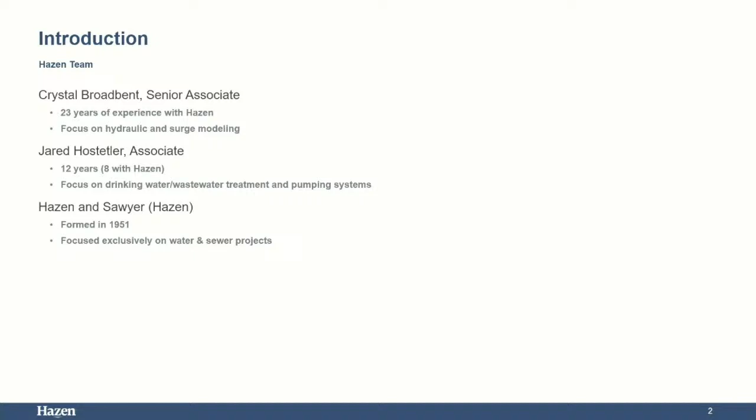Hazen and Sawyer, which we affectionately call Hazen, is a company formed in 1951. We're headquartered in New York City. We have about half a dozen offices in the Carolinas, and again, we're both in Raleigh.

So the meeting agenda today — some things we want to cover are what is a master plan, what are our goals and drivers in these efforts. We want to talk about system demands and all the growth that I'm sure you're all well aware of. I'll talk about the water treatment facility, and Crystal will cover the water distribution system.

This is the first water treatment facility master plan, but it's an update to the distribution system master plan that Crystal developed in 2017, 2018. So we're looking at every component in the system, and our goals are to plan for growth, look at redundancy and resiliency, manage and mitigate risk where we can, improve system capacity, optimize operations, and address ISO ratings that Crystal can speak to. We want to provide preliminary engineering for developing projects, and ultimately identify major capital improvements that we can roll into the city's budget.

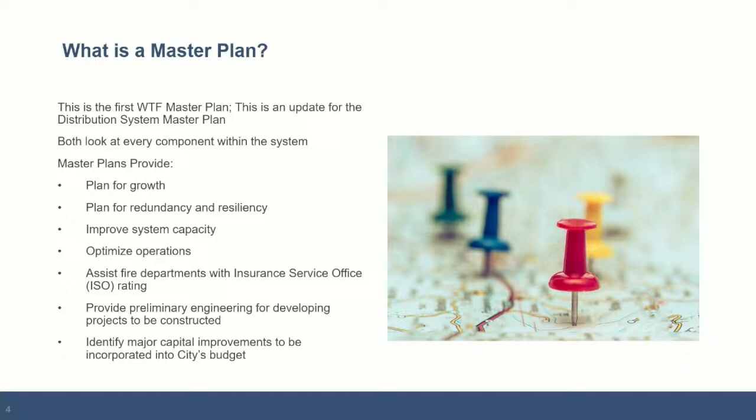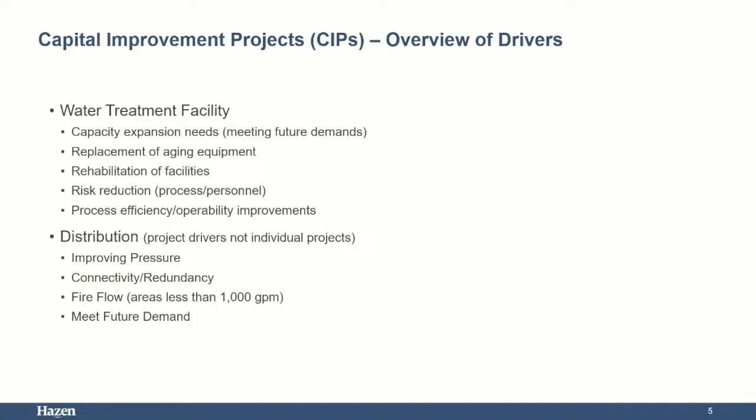The drivers for the water treatment facility capital improvement projects, or CIPs, include capacity expansion needs and the ability to meet future demands. We'll talk about replacing aging equipment, rehabbing facilities like structures in need of it, reducing risk for process and personnel where we can, and improving operations and efficiency. On the distribution side, it's about improving pressures in the system, providing connectivity with additional pipelines where needed so we don't have branches that aren't looped, improving fire flows, and meeting future demands. And with that, I'll turn it to Crystal.

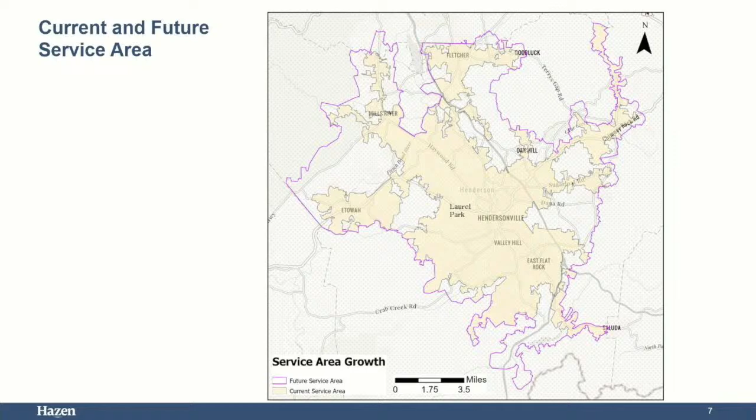Talking about future demands — to figure this out, we first look at your current service area on the water system. It's pretty extensive, shown here as the yellow shaded area. We met several times with both the city and the county to determine where the future service area boundary should be, depicted here as the pink boundary line. We use traffic analysis zones to identify where population growth as well as employment growth will occur.

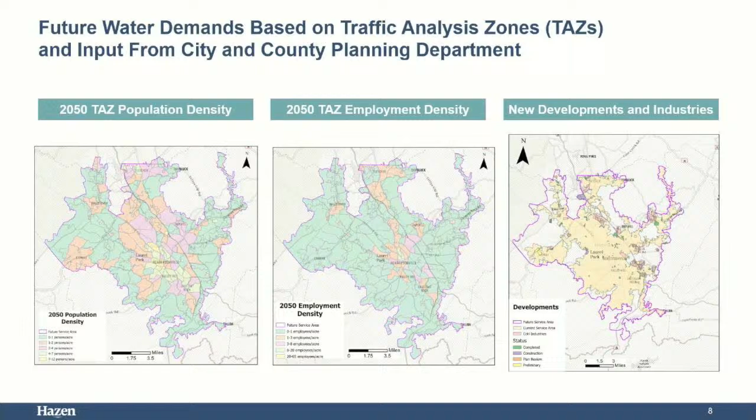And on top of that, the city knows where they have already approved development plans. So we incorporated those developments that are already approved and going to be in construction in the next 3 or 4 years, as well as areas that could be ideal for industrial demand. Those three things together give us our overall future demand projections.

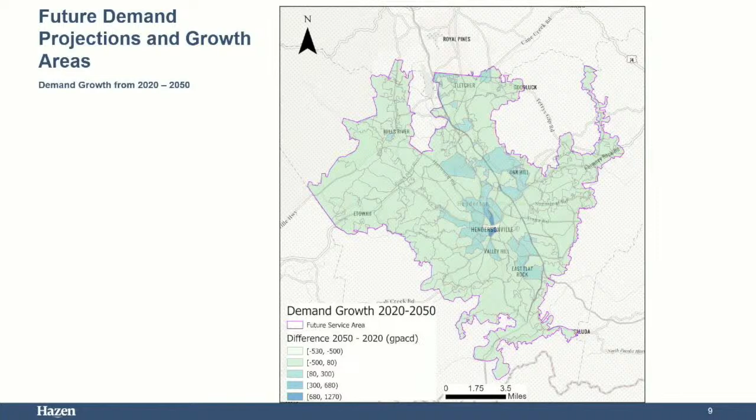This is showing you growth from 2020 out to 2050. The lighter the color, the less growth, and the darker the blue, the more growth we're expected to see in your area. You guys probably live here, so you can vouch for where you're seeing this growth.

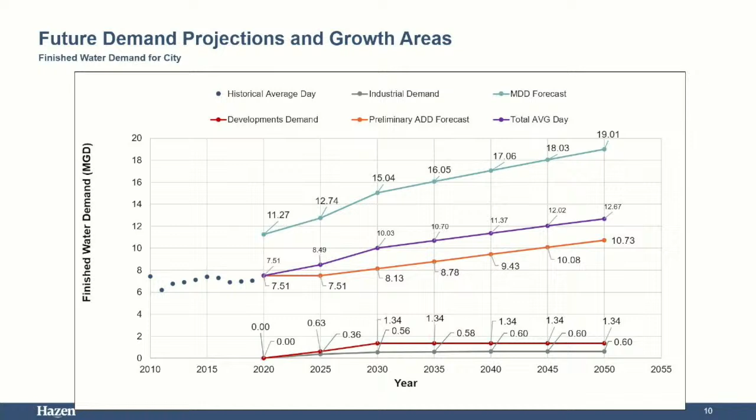That average day demand considers what the TAZ said, which is the orange line, the development demands, which is the red, and the industrial demand, which is the gray. Then we look at the historical peaking factor the plant has experienced and apply that to the average day to make sure we can handle peak demand out in the system, and that's about 19 MGD by 2050.

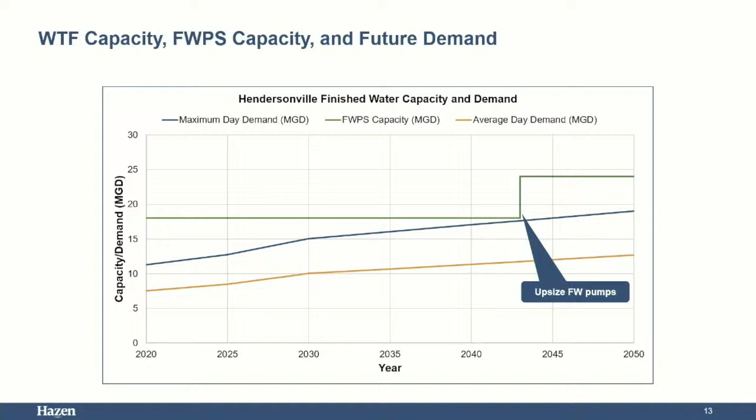So just looking at how it grows, if we flip through the slides, this is the projected average. Using a peaking factor of 1.5, we get to the max day. Looking at the finished water pump station's capacity, we do know we need to do some upgrading because they have to stay above that blue line.

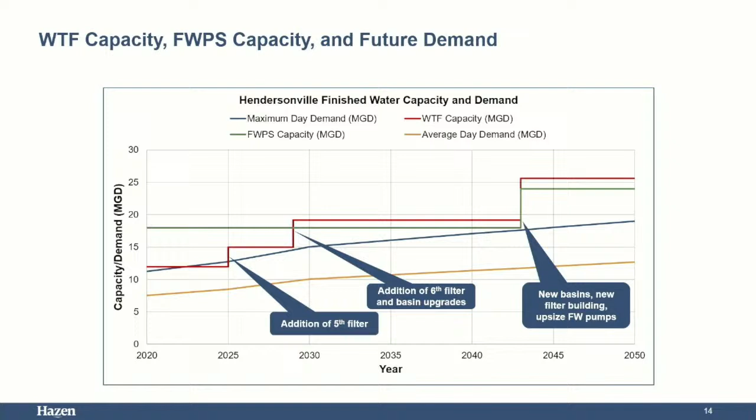On the water treatment facility side, we're adding an additional 5th filter, and right before 2030 a 6th filter needs to be added. And before 2045, some new basins, filter buildings, and upsizing the finished water pumps. Jared's going to dive into the water treatment facility.

As many of you know, the water treatment facility is located on Haywood Road, I'm sure you've driven by it numerous times. Originally constructed in the mid-1960s with a number of subsequent major improvements. It's currently permitted to treat 12 million gallons per day. In 2023, the average daily flow, as Crystal indicated, was about 7.3, and the maximum daily flow was 9.4.

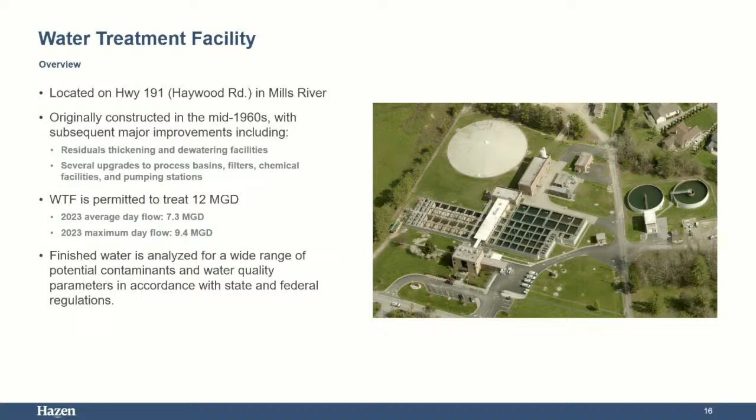And of course, the finished water is analyzed for a wide range of potential contaminants. Monitoring and reporting are conducted in accordance with state and federal guidelines. So we're going to step through from source to tap and work our way through this process of review. The first thing is our raw water screening and pumping facilities.

The facility is equipped with 4 raw water sources. The French Broad Intake and Pump Station is currently under construction and will be online later this year. The Mills River Intake and Pump Station is located essentially right at the intersection of 191 and 280 and is permitted for 12 MGD. The North Fork and Bradley Creek reservoirs are located in the Pisgah National Forest, with a combined permitted withdrawal capacity of about 4.5 MGD, flowing by gravity down to the water plant. So the total permitted raw water capacity, big takeaway here, is north of 30 MGD.

Some improvements we're recommending are that the air burst equipment be replaced at the Mills River Intake and Pump Station, which keeps the screens clean that sit in the river. Obviously nothing at the French Broad because it's still under construction. From the North Fork and Bradley Creek reservoirs, we're recommending that those aging transmission mains, as Adam indicated, some in excess of 100 years old, be inspected and assessed to confirm their remaining service life.

Moving on to the splitter box and rapid mix.

Back up, sure. I go over the Bradley Creek. What is it there, really intake lines, or is that all? It's the lines from those reservoirs down into town. Down in the town? That's right. Okay, I think about 16, 17 total miles of line. Again, that's aging cast iron, in some instances about 100 years old. Is it 2 lines that come together to make one, or do they separate? They converge in Mills River. Can I back up for a second? So one of the things about cast iron that old is it's usually unlined, which means it's tuberculating and the actual space inside gets smaller and smaller over time.

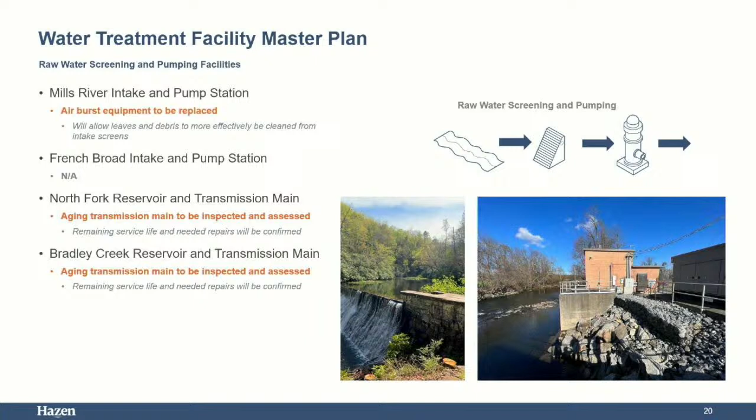So moving inside the fence, as we like to say at the water treatment facility, the splitter box and rapid mix basins. The splitter box receives all the flow from various raw water sources, along with raw water treatment chemicals, including the coagulant, polyaluminum chloride, which is added there. The flow is then split to the east and west process basins, which have rapid mix basins equipped with vertical mixers.

Interestingly, the plant staff realized that they don't need that mixing energy. They're getting the coagulation they need without those mixers, so those mixers have been turned off in the interest of energy efficiency.

Some recommendations here: we're recommending some interconnections of that raw water piping as it comes into the splitter box to provide some operational flexibility, and some minor structural repairs. You'll see a little bit of concrete wear on the outside of the structure.

And then increasing or extending piping on the west train during a future expansion phase. Essentially all the growth for future filters and basins will be on the western side of the water treatment facility due to space constraints, so we'll need to extend piping that way.

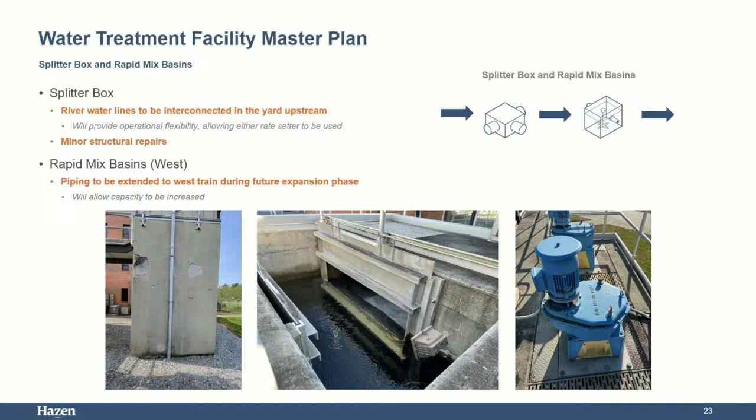Moving on to the floc, or flocculation, basins. This is a mixing process, and the goal here is to provide a certain amount of mixing time and mixing energy to agglomerate the raw water chemicals we're adding with the particles in the water, creating a larger particle that can then be settled out in the sedimentation basins downstream.

The kicker here is that we need a certain amount of mixing time, and on the eastern side of the facility, we're not getting that. So we're recommending some retrofits to those eastern basins during a future expansion phase to provide that additional hydraulic retention time and address some minor structural issues as well. And then, as I've indicated, new basins on the west to increase capacity there.

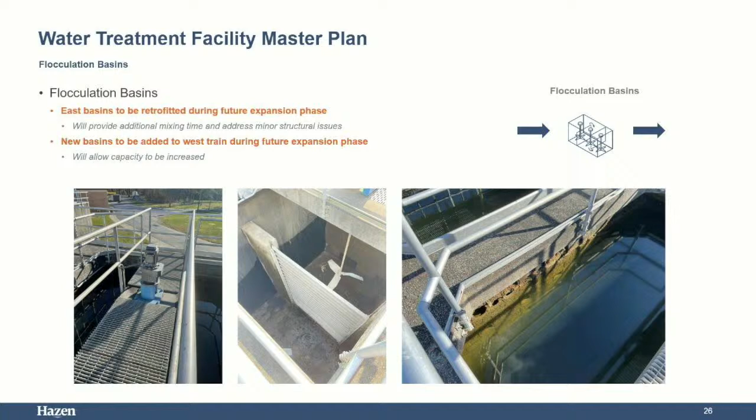Sedimentation basins, I like to call these giant swimming pools, no moving parts here. The goal is to provide quiescent conditions for those flocs to settle out, forming a sludge layer that's then removed periodically. The treatment capacity is determined by the basin geometry, so obviously you can only put so much flow through a certain size concrete box.

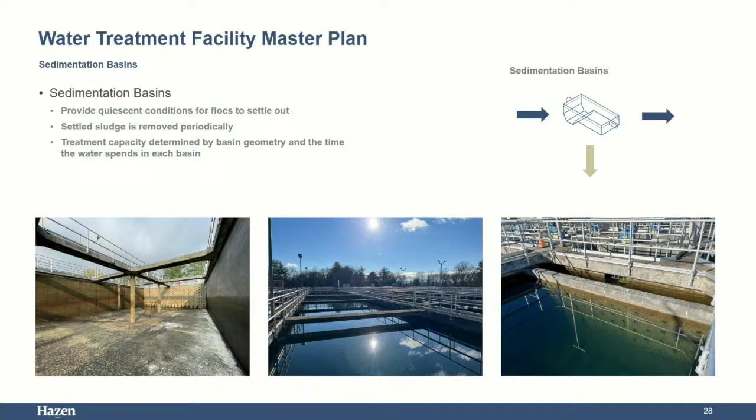The caveat to that is that we can add various technologies. This is a tube settler technology shown here on the left that essentially increases that effective settling area and allows us to push a bit more flow through that same geometry, increasing the capacity of the basins without needing to add more.

So we're recommending that in one of the more near-term phases of expansion, and then new basins will need to be added well into the future on the west side of the facility.

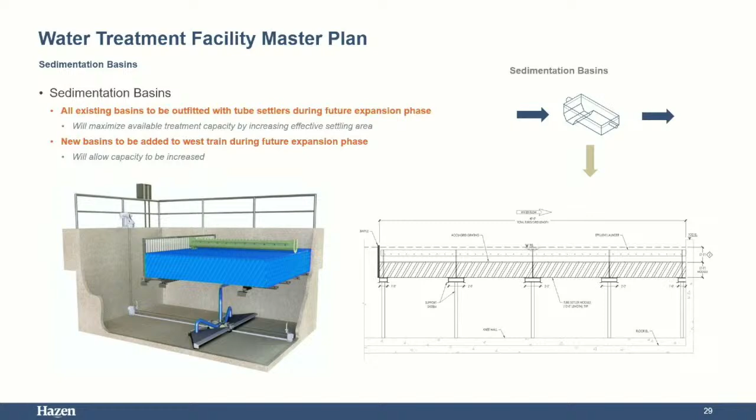Some other minor structural issues that we noted, including some cracks and some mortar repair that needs to be conducted, and then some minor process efficiency improvements, including valve replacement and adding some portable cranes to raise and lower equipment into and out of the basins for maintenance and things like that.

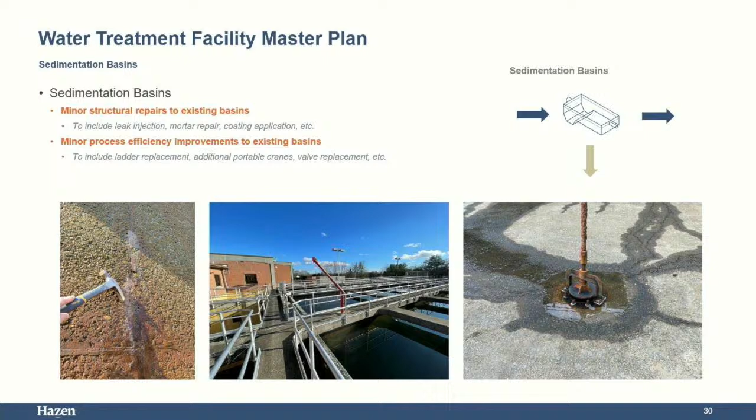Moving on to the filters. I think we all know how a filter works, but we're removing particles here that have been carried over from the sedimentation basins. The media bed consists of layers of anthracite coal and sand. Chlorine is added here; this is the primary location where chlorine is added for disinfection of the water. These filters are backwashed about a couple times a week on average.

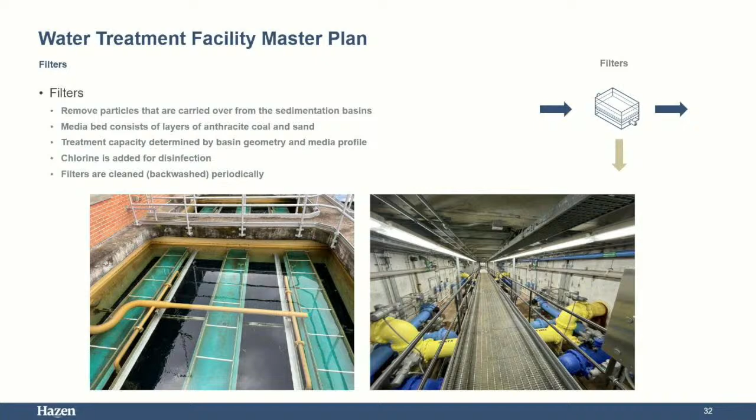So there's a project underway currently to add a fifth filter that'll be placed into service in 2025, increasing the rated filtration capacity to about 15 MGD. We're recommending a sixth filter be placed into service in about the next 5 years to take us to 19 MGD of filtration capacity, and then well into the future, 7th and 8th filters will be required.

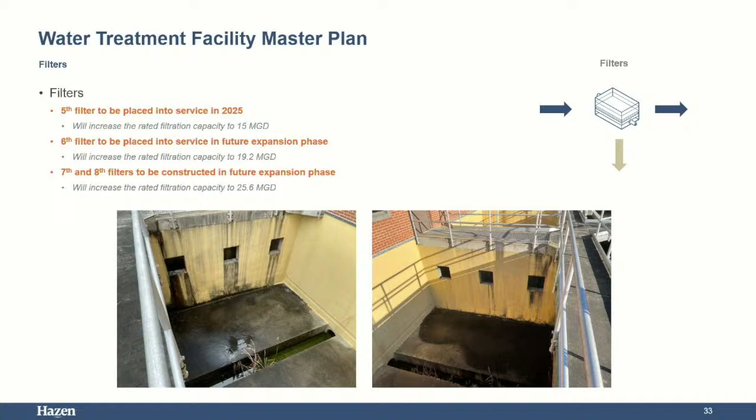Some other filter-related items: we're recommending that an additional backwash pump be furnished in the near term, providing redundancy for this critical process to keep that filter media clean. This is kind of a recurring theme you'll see today, maybe we've got a single point of failure, a single pump, a single tank, something like that. Let's provide redundancy and resiliency by adding a standby.

Additionally, in the future, as we add those new basins on the west side of the facility, we'll need to make room for a future filter building, so we'll need to relocate the backwash air scour blowers that are also used to keep that media bed clean, and at that time we would recommend that they be replaced.

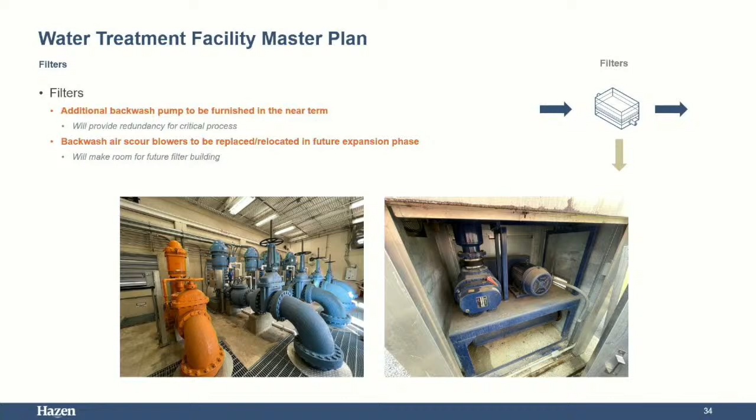So finished water storage - this tank is called Clearwell. It's 2 million gallons. It provides contact time for chlorine and the other finished water chemicals that are added. It also provides reserve storage volume, so it's essentially a large bucket we can pull from to fill the distribution system. It's located just upstream of the finished water pump station.

We're recommending that an additional 2 million gallon clearwell be constructed, again for redundancy. That'll allow the existing clearwell to periodically be brought down for maintenance. When that new clearwell is constructed, we recommend bringing the existing clearwell down for maintenance, and at that time installing baffle curtains, which will provide additional chemical mixing and contact time within the clearwell by providing a maze type of path that the water has to follow.

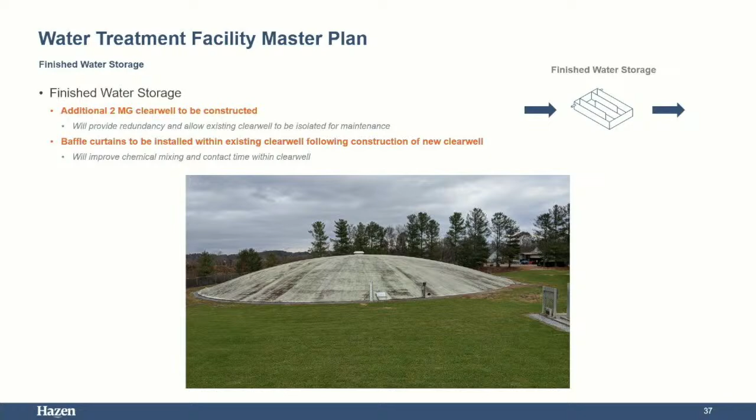So the finished water pump station was recently upgraded here in the past 5 years. Obviously, this is what's pumping finished water into the distribution system, ultimately to customers. It's equipped with 4 finished water pumps and has a firm capacity of 18 MGD, which just means that with the largest pump out of service, we can get 18 MGD out the door. It's got an ultimate firm capacity of 24 MGD when we upsize those pumps. This pump station houses the backwash pump as well.

So as we've discussed, we're recommending upsizing finished water pumps number 1 and number 2 in the future to provide 24 MGD of firm pumping capacity. There are some ancillary improvements here as well - some plumbing improvements, some minor structural improvements to be able to more easily facilitate the removal of equipment and get equipment in and out.

And then a redundant finished water line that we're recommending - this would be routed from the finished water pump station through the yard to the transmission main on Hwy 191. This just provides a couple different ways of getting water out the door. In the event we have a catastrophic failure of one of those lines, we still have a way of getting water to customers.

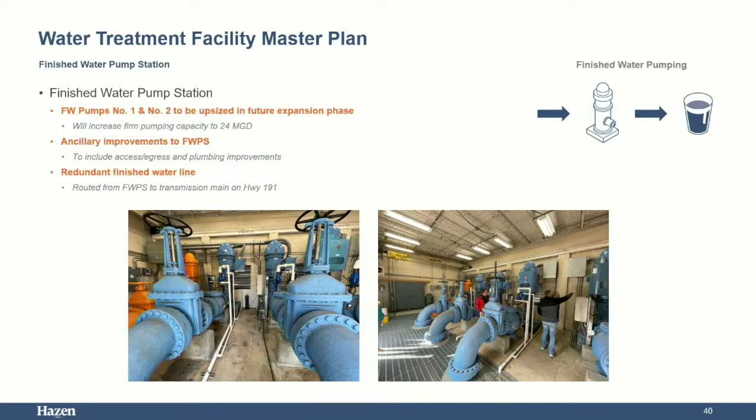We looked long and hard at ways to improve energy efficiency at the water treatment facility, and the short story is that there's really no low-hanging fruit there. The plant's being operated really efficiently. We had a couple minor recommendations in terms of operating the finished water pumps in the most efficient way with pump combinations and speeds to minimize energy per unit volume that we're pumping out the door. But really, not a lot that needs to be done or can be done to improve energy efficiency at the plant.

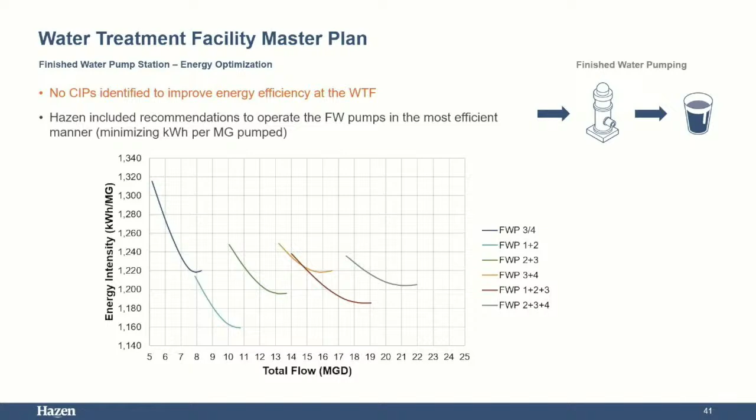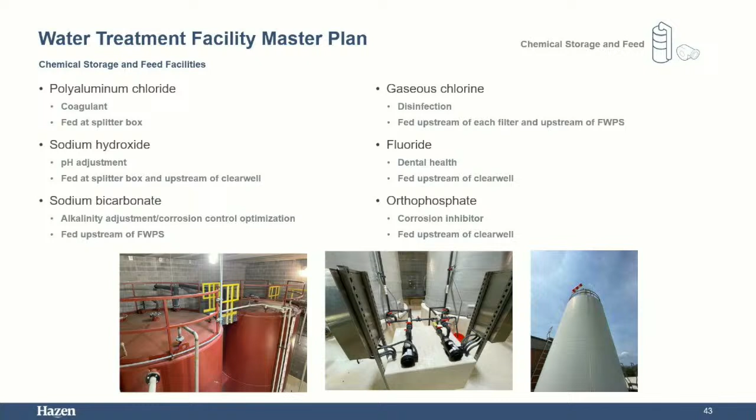So chemical storage and feed - there are 6 primary chemicals that are added to the treatment process. Polyaluminum chloride is added at the splitter box; this is the coagulant to form the flocks that we're then settling out. Sodium hydroxide is used for pH adjustment. Sodium bicarbonate is a major one used for alkalinity adjustment and corrosion control optimization, in conjunction with orthophosphate, which is a corrosion inhibitor. We also have chlorine gas for disinfection, and then fluoride, which is added for dental health.

With respect to the sodium bicarbonate, we're recommending that an additional silo be constructed, again for redundancy. This is a single point of failure. It's a critical process for the corrosion control optimization process. The existing feed equipment and the existing silo is at the end of its useful life and needs to be replaced. But before that, we would recommend that the additional silo be constructed, so we've got duty and standby mechanisms.

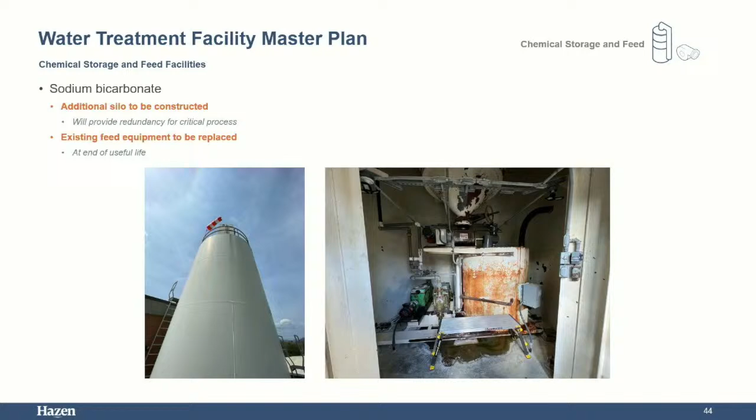Chlorine gas is used for disinfection, and unit prices nationwide have increased substantially in recent years. There's also been a number of potential supply chain interruptions that have been noted. So what we're recommending here is that a new chemical building be constructed in the future to house temporary sodium hypochlorite storage and feed facilities - bleach that could be used as an alternative disinfectant to the chlorine gas. This new facility could also house future tanks for something like orthophosphate.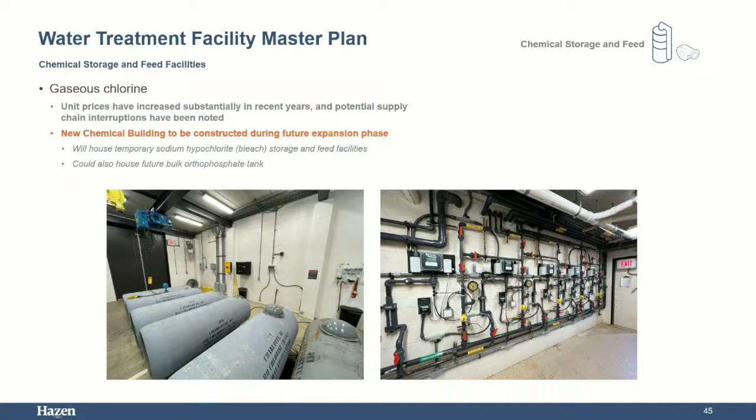Some miscellaneous chemical improvements - spare metering pumps, some chemical transfer pumps to move chemical from a bulk tank to a day tank, and some minor structural improvements as well.

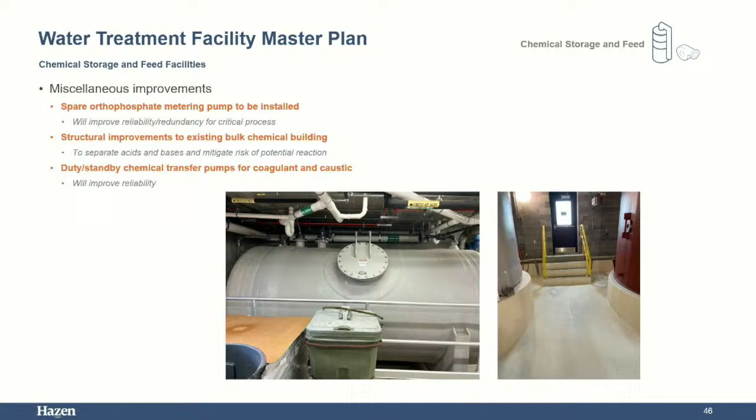And then finally, the treatment residuals. The waste streams from the sedimentation basins and the filters flow by gravity to this sludge transfer pump station. The blended residuals are pumped from here to thickening and dewatering processes for ultimate disposal. This station is equipped with a single pump that's approaching the end of its useful life. So in the interest of resiliency and redundancy, we're recommending that existing pump be replaced and a second pump be installed to provide redundancy for this critical process.

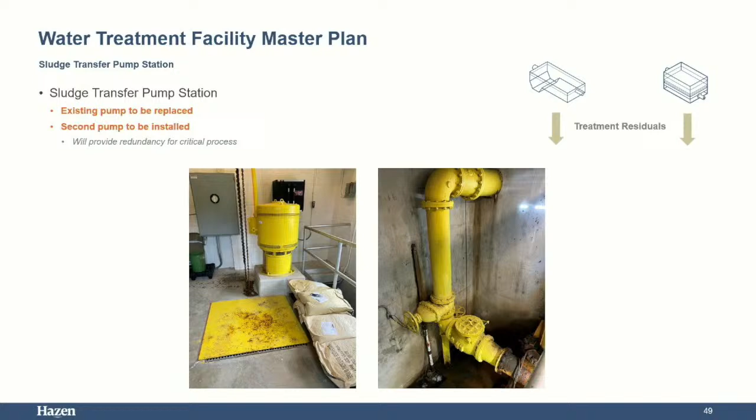And then some miscellaneous concrete and structural repairs that we've noted. We're recommending a new maintenance facility. I don't know how well you can see that center photo, but the plant staff have a very small area to store spare parts and to maintain equipment, so we're recommending a maintenance facility. And then some miscellaneous control system improvements to adjust some set points and provide some additional functionality.

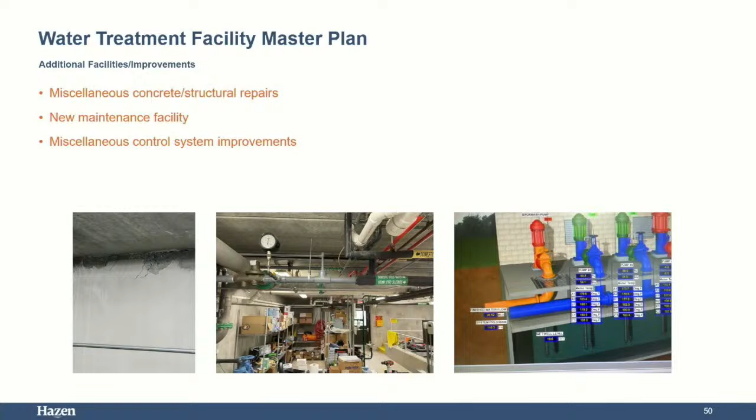Looking at capacities, on the raw water side of things, we've got north of 30 MGD of ultimate capacity. As we go through the treatment process, 25 to 26 MGD of treatment capacity through those process basins and filters. And then when we get to the finished water pump station, that's where we're essentially limited to 24 MGD by the nature of the firm pumping capacity of that station. So we're saying build out capacity of the water treatment facility is 24 MGD, and our maximum daily demand out to 2050, the end of the planning horizon, is about 19.

Do the chemicals, are they priced at a certain price, or are there discounts for buying larger amounts of chemicals in bulk? And if that's the case, does it make sense to have larger storage space for purchasing chemicals in bulk?

It's a good question. I'm not familiar with exactly how often Hendersonville negotiates those rates, but they're often negotiated, frequently every couple years. Some of those chemicals will degrade over time — specifically sodium hypochlorite. If your storage tanks are too big, over time you're losing the activity of that chemical. So it's kind of a fine balance there.

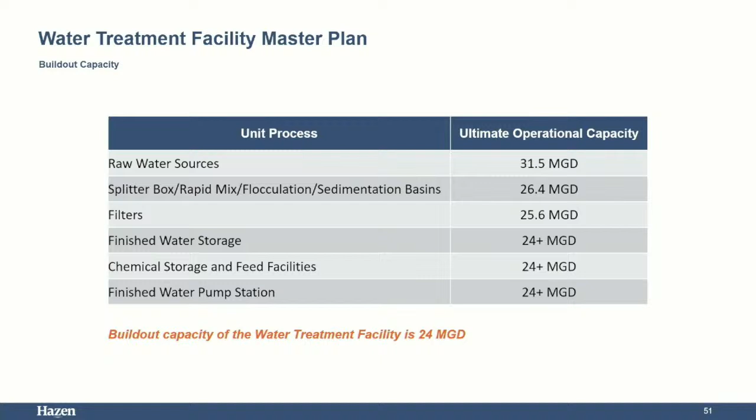So we've tabulated here all these different capital improvement projects that we've noted, and I've got some cost estimates shown in 2023 dollars. The big ticket items in this first phase, the 2020 to 2025 window, is the addition of that fifth filter, which is currently underway, and then the addition of a standby backwash pump.

In the 2025 to 2030 window, it's about 29.3 million total, but the big ticket items again are the inspection of those aging transmission mains from the mountain reservoirs, basin retrofits, the addition of a sixth filter, second clear well, and then the maintenance facility and the chemical building. So yeah, about 29.3 million there.

When you're talking about replacing those lines, will they have to be completely replaced or can they be lined? I should specify, this is inspection and assessment — we looked at a variety of different technologies. That's a fairly conservative number for the inspection of those lines, but it is 16 or 17 miles of line. So our recommendation would be to inspect the whole thing.

There are technologies that can be inserted and travel through the line. There are other ways, using ultrasonic technologies, from point A to point B. However the city ultimately ends up tackling it, we'd recommend inspecting the full extent of those lines and then determining whether there are areas that need to be replaced, or whether we're still good for another 20 to 50 years. Do we own the equipment that actually inspects the line, or do we rent or lease it? It would be a third party that would come in to assist with that.

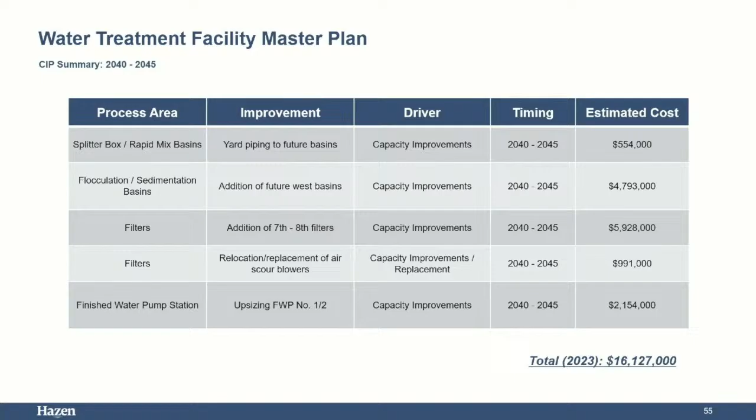I guess I would be remiss if I didn't say, I'm from Hendersonville originally. My parents still live here and drink the water. So it's been an honor and a privilege to work on this project. And as you well know, fantastic water, great water quality.

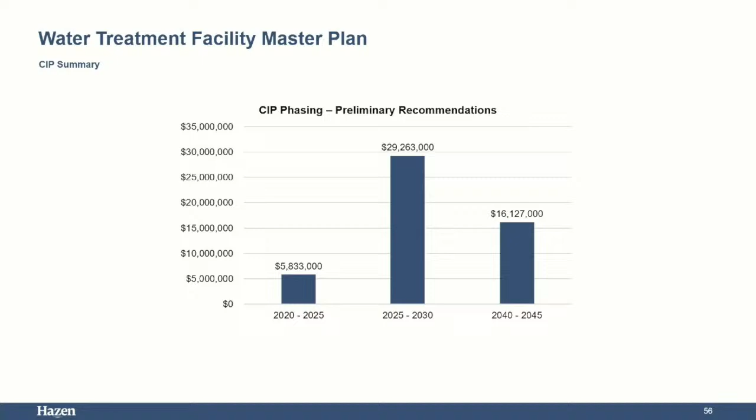All right, here we go. So this is your hydraulic model.

We first built this model in 2015 with the support of the fire departments. One of the things we mentioned we can utilize the model for is to assist the fire departments with their insurance ratings, and that requires a highly calibrated model. We update calibration every couple of years to ensure we're giving them the answers they need for their insurance. The model is built from the GIS, and the city provides us updated GIS.

From that, we get the diameters of the pipe, the age of the pipe, the material of the pipe, and we bring that in, which helps us determine what we call the roughness, or the coefficient, that determines how much loss is occurring in the pipe. So the downtown areas that have a lot of cast iron, it basically takes an 8-inch pipe and makes it act more like a 4-inch. Areas that have a lot of PVC stay the same size.

We use the billing data to make sure we're allocating the demand out to where the demand is actually occurring, so the water actually flows through the pipes as it really does. We add elevations to make sure we're getting the pressures correct. And then the model does the calculations for us, telling us where the flow is going, what the pressures are, how the pumps are performing, and what the tanks are doing.

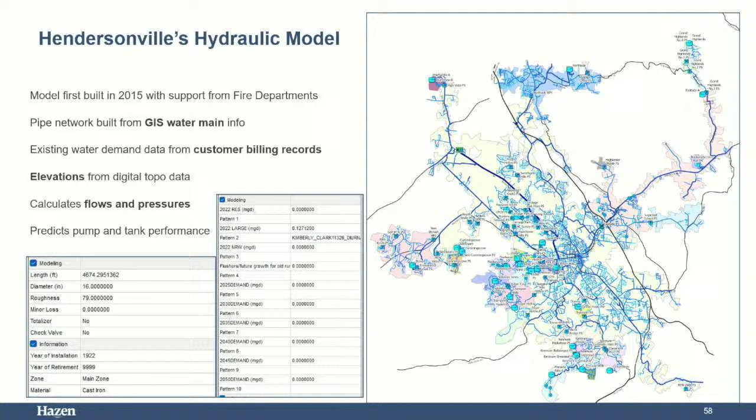One of the things we do is calibrate the model. What we mean by that is we actually go to the field. This is just the 11 sites for this go around - we've done about 11 sites every couple years. And we do fire flow tests.

We open hydrants and watch to see what the static and residual pressures were. We mimic that in the model and calibrate it, meaning we make changes, whether it's closing a valve we think might be closed - and the city goes out to investigate if the valve was closed - or if we need to change C factors, or correct some connection we don't have right in the model. As you can see, we calibrate within 5 PSI, and we're pretty much spot on with this model.

The next thing we do is make sure the controls are working correctly in the model. So we take the SCADA data we receive - here is an example. The dots are the SCADA showing how the tanks are behaving, and the solid line is how the model's predicting that same behavior. We do that for each pressure zone, making sure the model represents what's actually happening in the system, which builds confidence in the decisions we make from the model.

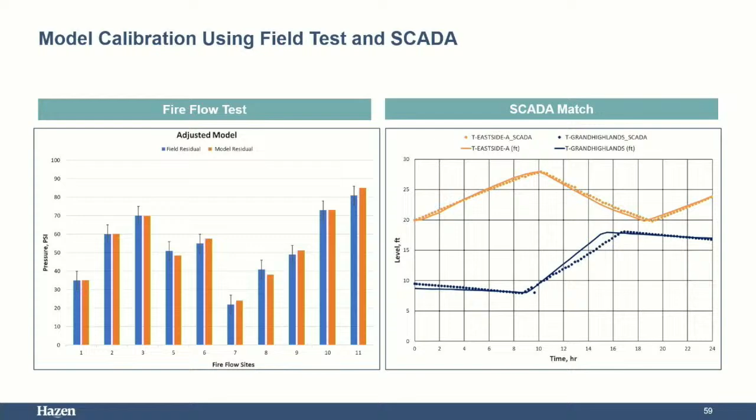In 2016, when we were doing this master plan last time, we identified areas with low pressures, and the city has since done projects to resolve these low pressures. On the north side, they put in a booster pump station and a new elevated tank, which brought the pressures up from close to 30 all the way up to the 60s. Etowah was another area that struggled with some pressure issues.

Since then, the Etowah pump station has come online, as well as the new elevated tank. Hebron was another expansion to resolve some of the low pressures near the Ewart tanks. And Sugar Hollow was another expansion that resolved issues. You will still see some areas of low pressure in the south.

In the prior master plan, we made some recommendations that we are also continuing to keep in this master plan, and we'll be showing that pressure zone change in a couple slides.

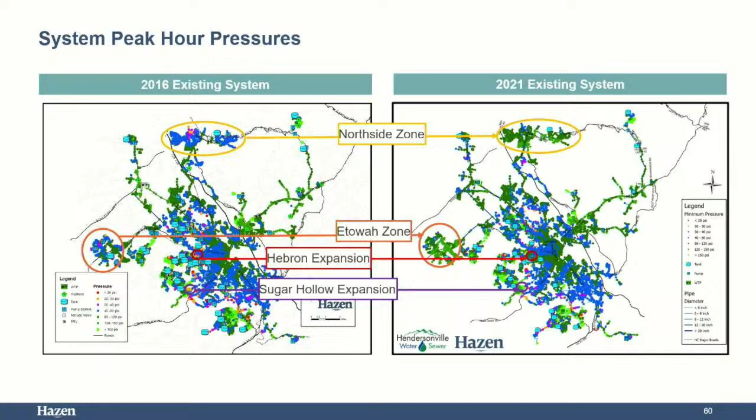The same areas we identified as low pressure also had low fire flow availability. These colors are based on what's available at 20 PSI, so anything red tells us you can't even get 500 gallons per minute at this hydrant. A couple reasons for this in your city are low pressures due to elevations or just small diameters. We can't really resolve the elevation issues unless we create new pressure zone boundaries.

So on the north side, we had low fire flow ability in 2016, but now because of the new pressure zone, we've resolved a lot of those fire flow issues by creating a new pressure zone boundary. Same thing with Etowah.

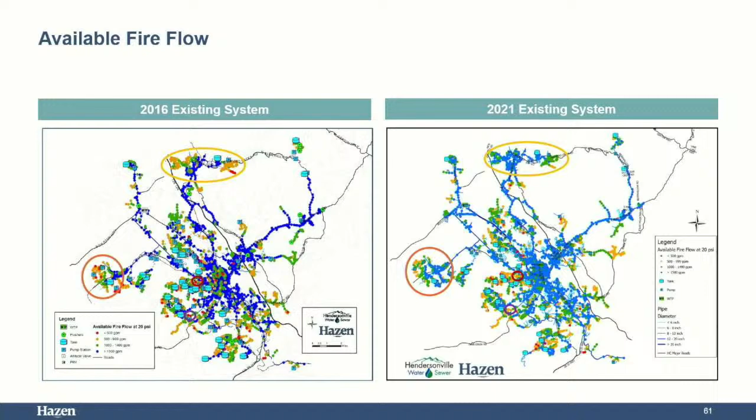The other thing the model can tell us is the age of the water. As the model predicts the water moving through the system, and because of the demand being pulled out, it can tell you what the age is. So everything identified here in red and circled in a box tells us that the age in these pipes is pretty old. That doesn't necessarily mean it's bad water - it just means the water's been sitting there in the pipe.

What we can utilize the hydraulic model for is coming up with a flushing program. It's a very specific flushing program called unidirectional flushing - very precise in how you open certain hydrants and close off systems. So you're flushing out the pipe at high velocity, cleaning out any debris or other issues. They have a plan to do that in each of these areas that report really high water age.

I have a question. Yep. How do you determine if it's a boil water advisory? I mean, how is that determined?

Usually that's when pressures go below 20 PSI. Is that what you guys do here? So it has to be below 20 PSI before they call a boil water alert. And usually your system will never see that.

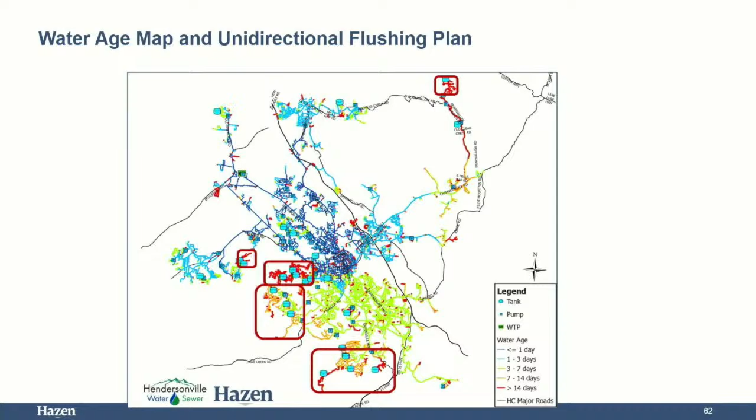So when we get into the master planning and project out to 2050, one of the things we did in the master plan is looked at every single booster pump station in the system and compared it to the max day demand. The pumps have to be able to pump out what the maximum day demand is - you can't meet that just with your storage tanks.

So this is just an example. In 2050, the east side, which is the yellow area - the blue area is where your water treatment plant feeds into what we call the main zone - the 2050 demand on the east side is about 2.84 million gallons per day. The firm capacity of the east side pump is only 2, so we need additional pumping capacity. There is space at east side to add an additional pump.

However, we feel like it would be better to have a redundant pump station, not just rely on one, because that's the sole source for this entire community, and there's a lot of growth potential out there. So we're recommending a Clear Creek pump station, also sized for 2 MGD, and a new transmission main to get the water over into the east side zone.

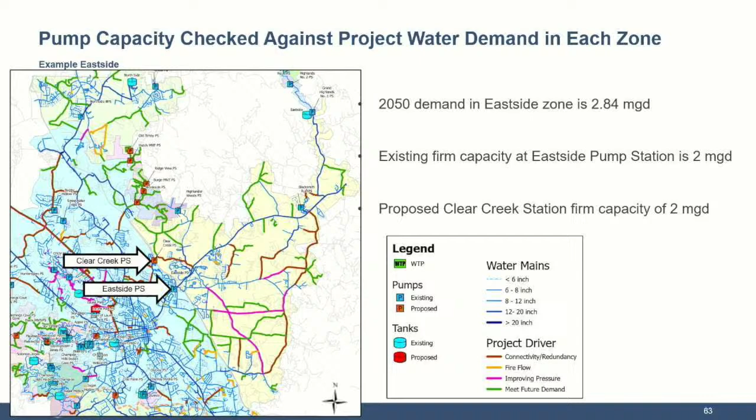So just real quick, also on this map, when you guys get back to look at it, we color coded by the pipe by the drivers. So the brownish colors are connectivity and redundancy, yellow was to improve fire flow, pink is to improve pressures, and green will be mostly just met by the developers when the demand calls for it.

So on the north side, there's some major projects we're recommending. One is we have to be able to get the flow out of the treatment plant into the system. Right now it's a 24-inch down Hayward, so we're recommending a 36-inch, and then transferring after Rugby to a 30-inch all the way down to Ewart Hill tanks. A lot of that's going to be in conjunction with the DOT, so some of that cost will just be upsizing the cost from the 24 to the 36 or the 24 to the 30, depending on how it works within the DOT right-of-way.

Again, you can see the Clear Creek pump station. We'll talk about Long John Mountain in the next slide. The 16-inch line to feed the Clear Creek pump station is currently an asbestos pipe.

It's pretty old, so we recommend replacing it and upsizing it from, I think it's a 12 right now, to a 16, and improving that pipe material as well.

You can also see here, highlighted in the orange circle, the whole reason for those water lines is to improve pressures in that area. Right now there's a little booster pump station that feeds some of this area. That will be removed by installing these water lines, also improving pressures down into an area that a lot of industry is coming into.

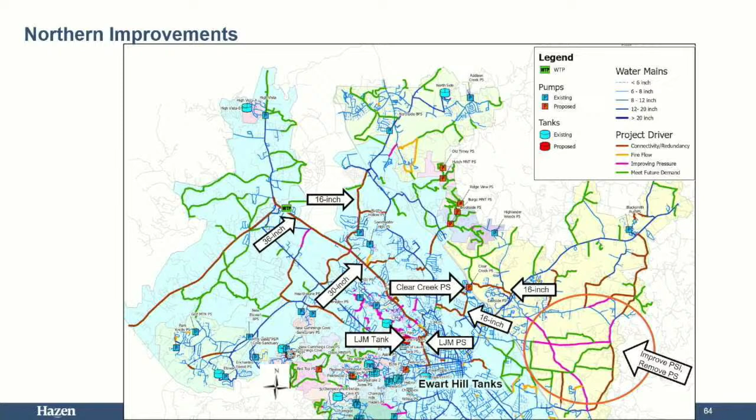So when pressures do drop within this new pressure zone, water can come in for a fire. This is a great improvement. It will save a lot on maintenance and energy over time, because you're only dealing with one pump station and one tank instead of a series of them.

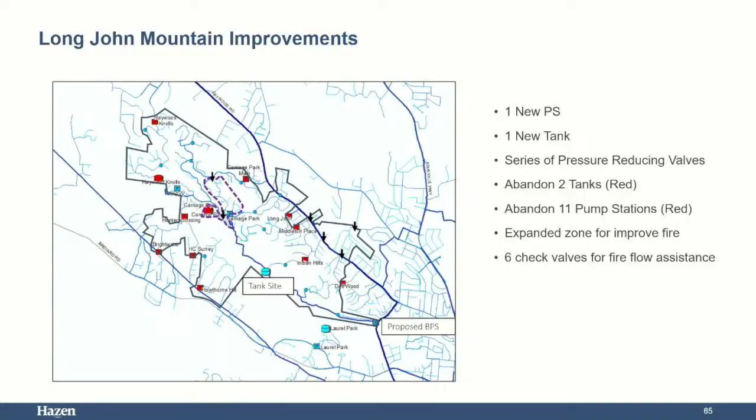So the southern improvements—I mentioned previously there were low pressure issues still in the south. This is where the new pressure zone comes in. I'm not sure what they're going to call it, just the south pressure zone, but I call the pump station the Crail Farm because it's on Crail Farm.

And then a new elevated tank, which would be the Glassy Mountain Tank location. This new pressure zone, outlined in the dashed orange line, will improve pressures everywhere. The city will have to confirm that the existing tanks and pump stations that come off this pressure zone will now have a new suction pressure.

So there might be some changes needed at some of the other pump stations, for example Kenmure, Greenmore, or Claremont. This greatly improves pressures as well as suction pressures at those pump stations, because they're pretty low right now.

The other circle up there points to another improved pressure area. One of them is very similar to a project they've already done—it's just adding a new line to the pump station, then back feeding over to an area that has really low pressures.

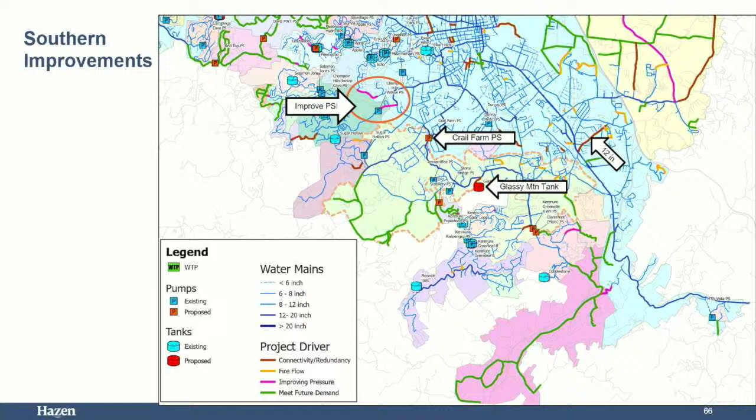Now that the Town of Laurel Park is part of your system, we can use that elevation to actually remove a pump station that was going to be needed to meet some of those pressure demands, just by adding a connecting pipe. That 12-inch line is a really good connectivity, redundancy, and fire flow line for your system. It's only a 4-inch along that route right now.

So here's what the improved pressure map looks like. There are still some areas of low pressure, but that's just because of elevations—there's nothing much we can do about them. Most of those homes already have pumps to meet those needs.

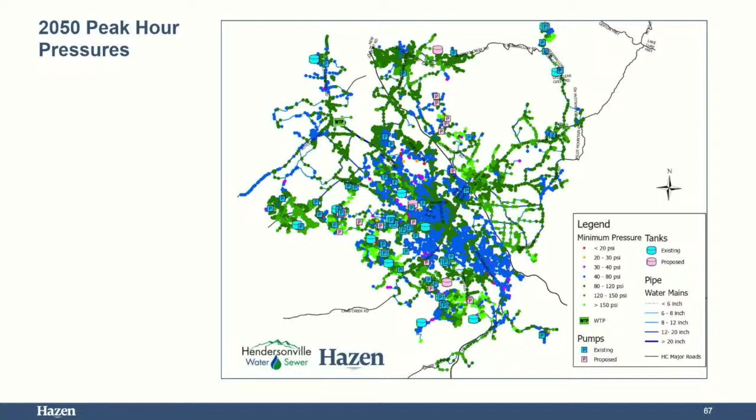The available fire flow map—you can see there are still some areas of concern. Our goal was looking for 1,000. You might ask why we still see orange: well, Laurel Park has a lot of orange because they just have really small pipes. Until they replace those due to age, wear, or breaks with larger sizes, you'll continue to see low fire flow availability there.

And then down in the lower area, it's just a bunch of 8-inch pipe, and you can only get so much water through an 8-inch. But it's all above 500.

So the major outcomes of the water distribution master plan: 13 new pump stations. However, many of those are going to be driven by developments and not by the city. There are really only 2 major pump stations the utility has to oversee, plus a couple minor changes just to the pumps within existing stations. Also 2 new storage tanks and 13 new pressure zones.

We're going to abandon 11 pump stations, abandon 2 storage tanks, and add about 200 miles of new pipe to meet the demands.

So what I'm showing you is prices for the city projects that are driven by connectivity, redundancy, improving pressures, and significant fire flow improvements. These don't include the projects that are just driven by demand only. So in 2025, we're also giving a demand driver because we've used the year as a way for us to organize things, but it's really driven by what the demand is. So once we start seeing consistently 9.5 MGD max day within the treatment plant, these projects need to be under design, and some of them already are.

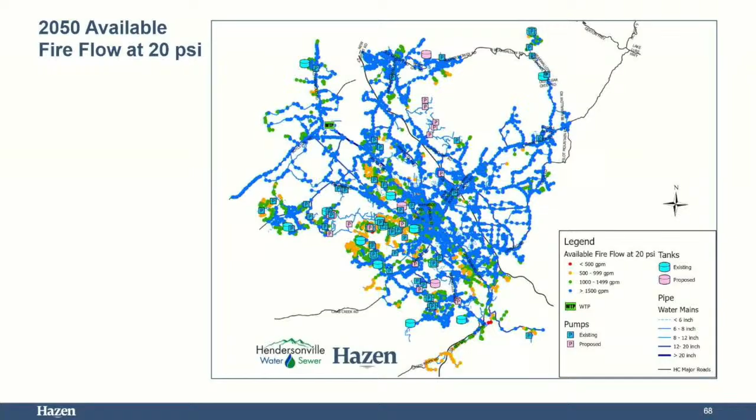Okay, first of all, I just had a quick thought. Could you go back to the slide with the 120? Can I get back to the slides? Which way? What do you want? 120 million for 2025.

That also included the 191. Yeah, that included the 36-inch along the DOT. So part of that, we were being conservative, so this includes if Hendersonville was to pay for the entire 36-inch water line, not an upsize, which is going to be done as part of the DOT's 191 widening. We just don't know which part is you, which part is not, so we assume the worst. And you said this is all outside the fence, is that what y'all call it? Yes, just outside the fence.

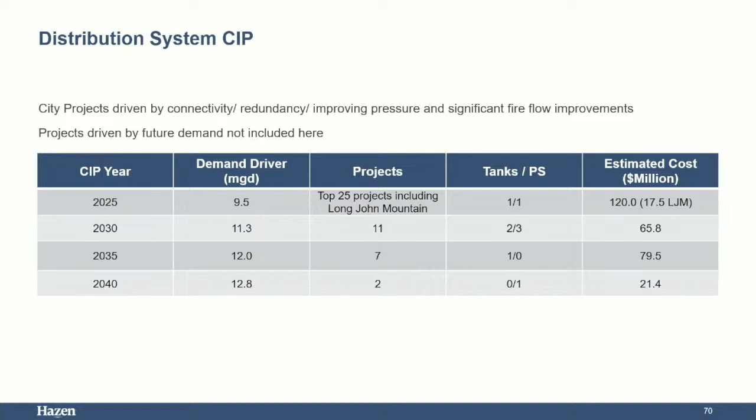So the 25 projects, let me kind of go back. So coming out, the master plan report will have this all color coded by year, not by driver, but we wanted to show you by driver here. So the 36-inch coming out of the water treatment plant, there is some critical piping to support Etowah. There's some fire flow piping. Some of that pink piping out in the yellow area is going into 2025. That's to help us get rid of the schoolhouse pump station, or Sugarloaf pump station. And so there's a list of what we identified as 2025 projects, and then Long John Mountain and its tank. It's a long water line from the pump station up to the tank too, and we're looking at a 12-inch there.

Crystal, another thing that came up at Water and Sewer Advisory was a difference between the previous master plan and the new one: the east/north side and that Clear Creek station, the Balfour Parkway not happening. Impacted. Yes. So in the last master plan, Balfour was planned for, and we were just going to follow that and put the new east side pump station along that route. Instead, what we're having to do is follow and replace that AC pipe and kind of wander through your system.

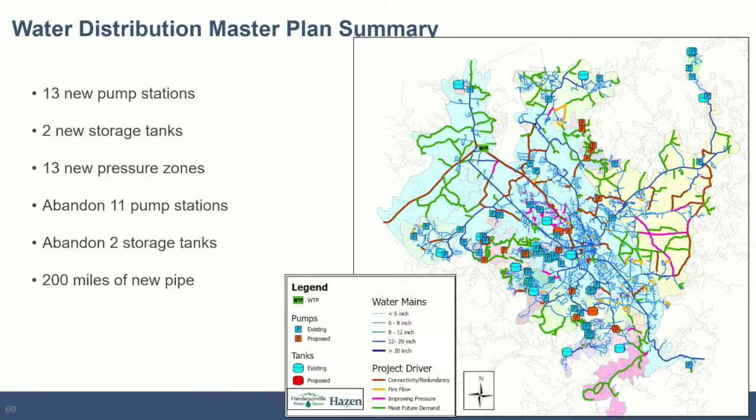Anything else? All right, thank you very much, we appreciate that. I'd just like to thank Adam and the team - they've done a great job. We are putting a lot of money into the infrastructure of our water and sewer system and planning really well to keep it up to par, and really appreciate your work, Crystal. Y'all have done a great job. I just want to say thanks - I appreciate working with these folks because they're great to work with, getting us the information we need, and response time. It's been a pleasure working with them. Thank you all, everyone involved, for pulling that together.

Okay, next, a zoning text amendment regarding tree preservation and new planting requirements. Daniel.

Good afternoon. So this evening we're presenting the proposed tree preservation ordinance. Obviously this is just for review and comment at this time. It's a land development ordinance, so it'll require a public hearing prior to adoption.

A quick overview: as you know, the City Council created a tree ordinance study committee in April of last year, and the stated purpose was to study and recommend ordinance provisions related to the preservation of the tree canopy within the city of Hendersonville.

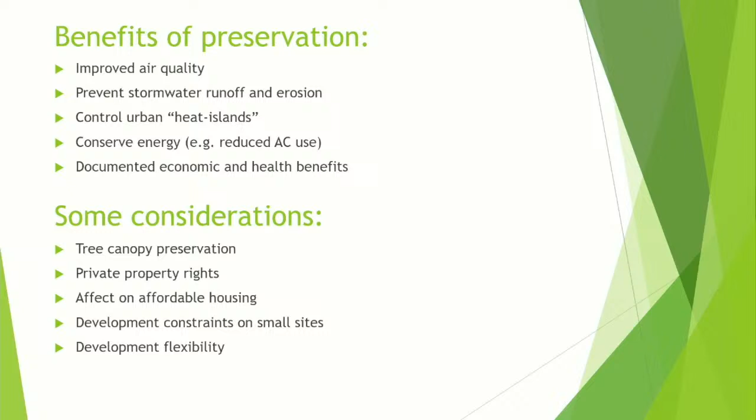The tree canopy cover assessment - you may have heard of this document. It was a study done by a consultant hired by the city. Among other things, the main thing it does is measure the amount of the city covered in tree canopy. I'm not an expert in this assessment, I wasn't super involved in the development of it, but it's important to note here because we are working from data developed as part of this assessment.

So currently 35% of the city is covered in tree canopy. It looked at city limits and ETJ only. There's other things it measured - it measured possible planting area, impervious area, unsuitable planting area, like a baseball field where you technically could plant a tree but it's unsuitable for some other reason. And the data it used - it analyzed the USDA's National Agriculture Imagery Program maps, and that takes an aerial shot of the city in the middle of the summer when the leaves are fully in, versus most of our imagery which is in the winter because we want to see more of the stuff under the canopy.

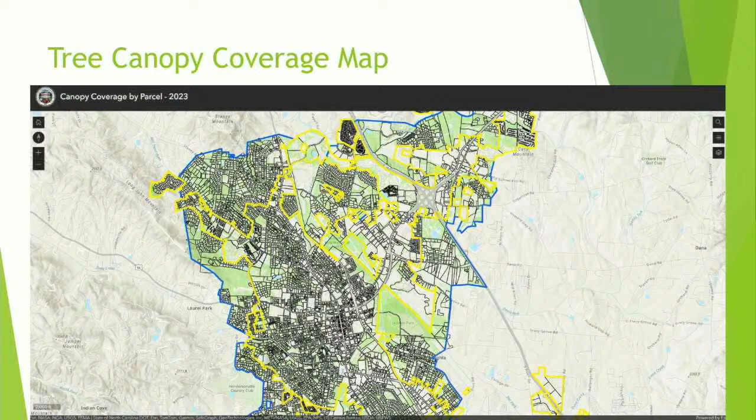So let's see, we can pull up now or later the actual tool and scroll around and look, but it's pretty much this simple - you click on a parcel and it gives you that information. So, oh, here we go.

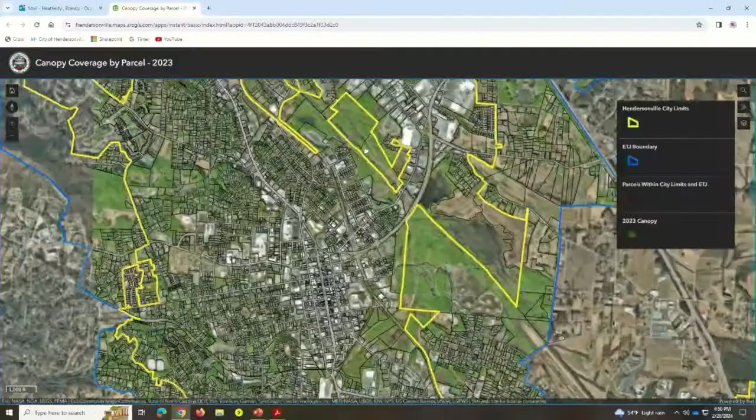So this would be kind of the base. Just click on any old parcel. This would be the starting point, starting from zero. What's my existing tree canopy? We'll get into, so therefore you have to preserve. But at 317 North Justice Street, you've got 42% of that site covered in tree canopy, 8,400 square feet. So there we go.

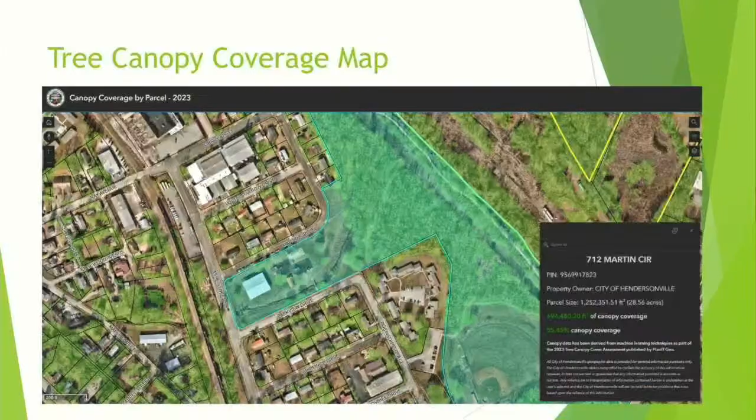Back to my PowerPoint, please. Just a quick note on existing landscaping requirements. Of course, we have landscaping requirements in our ordinance.

Developers have to submit a tree survey showing all trees 12 inches in diameter. There's parking lot landscaping requirements. There's various buffer requirements based on your proposed use. You can get credits towards landscaping requirements for preserving existing trees, but that's an incentive only. There's no requirement to preserve existing trees currently. There's street tree requirements in some areas, like the entry corridor overlay district, the main highways into town, and certain zoning districts. There's open space landscaping in mixed use districts only. And as I mentioned, there's no requirement to preserve existing trees.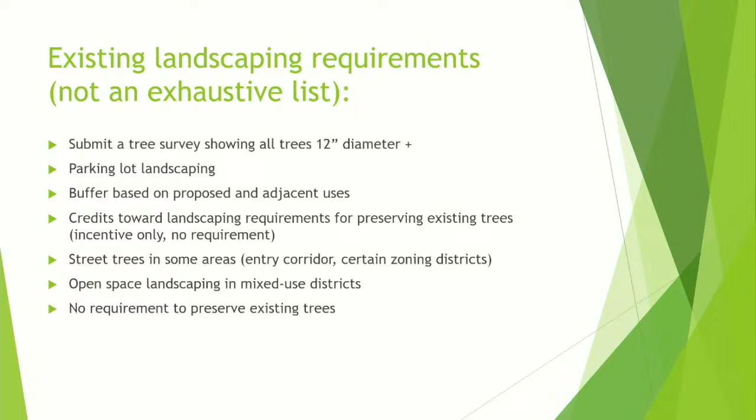So the proposed changes, a broad overview of these. There's tree preservation standards established. That's the big one, and we'll get into those in detail on the next slide, or the one right after.

No tree survey required. So we're looking at tree canopy percentage instead of individual trees. Therefore, we don't need to see every single tree 12 inches in diameter. I think that's a big benefit on the part of the developer, because that's something they normally have to do as they submit their application. It's a cost up front and time up front that they're getting to skip now. You only have a plan showing the tree line. I've got an example of one of those on a later slide.

There's no credit for invasive species. So if you have an invasive species on your site, you won't get credit towards new landscaping requirements.

Trees used to meet new landscaping requirements—I put landscaping in there twice, sorry—must be 75% native species. That's not the preservation requirement. So if I have a parking lot and I need 4 trees for my vehicular use area, 75% of those, so 3 in that case, would have to be native species.

There's a new multifamily residential buffer to lower density residential. That's an 8-foot type A buffer that you may or may not be familiar with, but basically right now, residential to residential, even if it's a very dense apartment complex to a single family development, by the letter of the ordinance, there's no buffer required. A lot of times those get negotiated at council or something like that, but this would establish a standard for that.

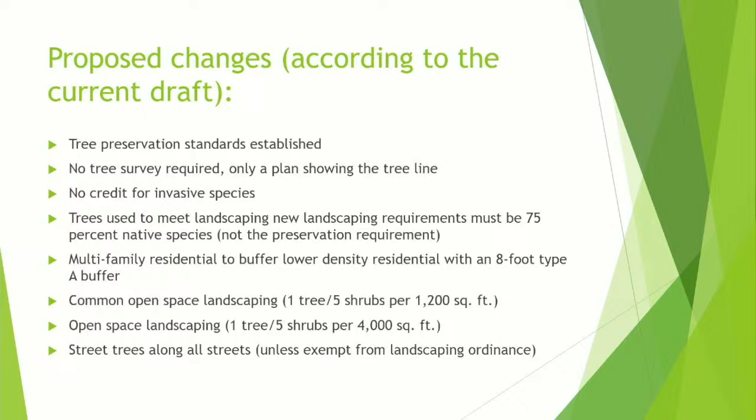Getting into the meat of the proposed tree canopy preservation requirement, that's the bulk of the new requirements of this proposed ordinance. To start, it would not apply to development sites with 30,000 square feet or less of existing tree canopy. I mentioned that's a staff recommendation.

The version that came out of the tree canopy study committee said on sites that are 2 acres or less. As staff reviewed that, there was some concern that it exempts a lot of sites, and also it's not exactly related to the existing conditions on the site. So regardless of how much canopy were on that 2-acre parcel, it wouldn't make as much sense to be the exemption threshold.

So 30,000 square feet of existing tree canopy, regardless of the size of your site. So you have a 1-acre site, a 10-acre site. If you have less than 30,000 square feet of existing tree canopy, you wouldn't have to bother with tree canopy preservation. That allows you to be a little more flexible if the existing canopy isn't a lot but is very inconveniently placed for your driveway and utilities.

Existing canopy is according to the most recent tree canopy cover assessment. You show that by looking at our tool. If there's no canopy data in our tool, because you're outside the city or the ETJ and you're annexing for some reason, and the city's reviewing your development plan, then the developer submits a plan showing that. If you disagree with our tool, because there's some amount of approximation—we're overlaying the data over county parcel data—you can submit a plan sealed by a professional showing the accurate existing canopy as of the date of your cover assessment.

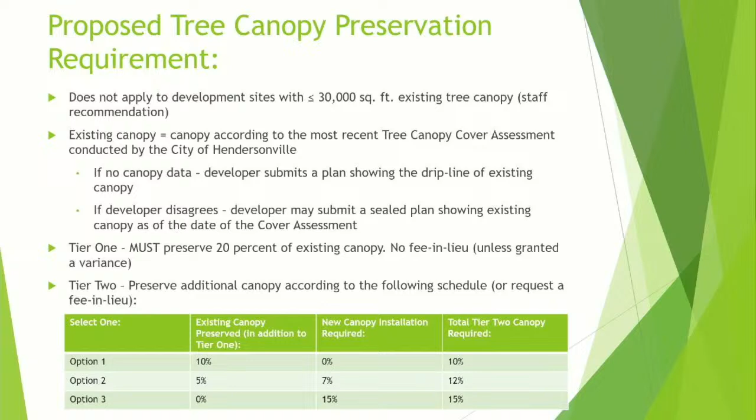Trees preserved are eligible for credits towards other landscaping requirements as long as you meet the criteria. For instance, vehicular use area landscaping has to be within 20 feet of the vehicular use area. So if I've got a parking lot over here and a tree I'm preserving 1,000 feet away, it wouldn't count. But if it's close to my vehicular use area, I might get some credits there.

You can request a fee in lieu for the tier 2 canopy, and I've got some details on that. There may be a delay in your development approval for 3 years if all or substantially all the trees are removed in violation of the ordinance. That's in there to put people on notice that this is one of the possible remedies. There are others — we could assess a civil penalty, or try to get a court order. We'll assess it holistically when there's a violation, but that's one of the possible ones.

Here's an example of the tier 1 and tier 2 requirements combined. Assume a 5-acre development site with 2 acres of existing tree canopy. The 5 acres is irrelevant because we're just looking at the 30,000 square feet of existing canopy — that's the threshold we care about. There's 2 acres of existing canopy, so we're over that threshold and you have to comply. Tier 1 is static across all the options.

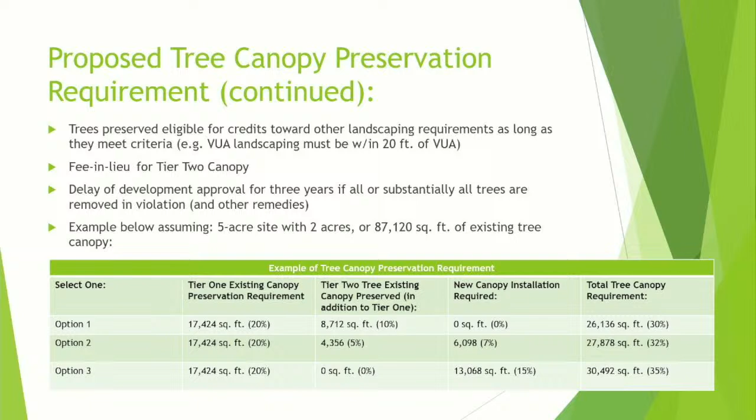So a very quick example, and I've got more detail on future slides, but I mentioned Henderson County EMS here because they had a plan that showed something helpful for this process, and it's a pretty good example of preserving a lot of trees. It's probably compliant with this proposed ordinance.

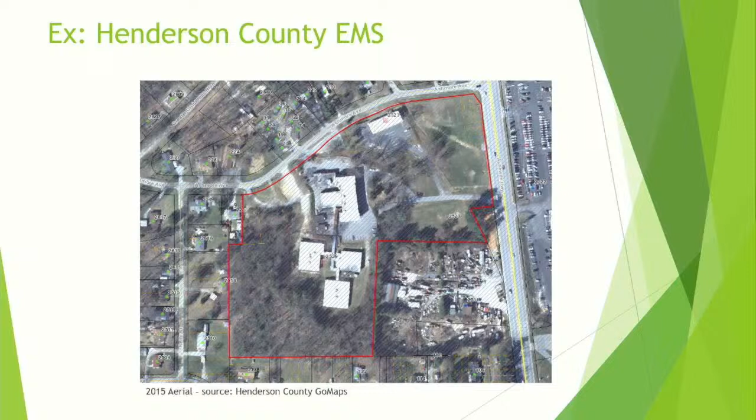This was a 2017 plan when they built the new EMS building. I don't have the data of the existing canopy from before approval, but this is a snapshot of the 2015 aerial, before they built the new structure, and you can see where the existing canopy is. That's a snapshot of it on our tool now, so they dug some of it out to make room for the new building, but currently 30% of the site is covered in canopy.

The reason I show that is their landscaping plan here, highlighted, showed their existing tree canopy present and to remain. I'm sure you've seen the tree surveys come through on various conditional rezoning applications with the different dots and 36-inch oak, et cetera. This would turn into a line on the plan. They would have to add some data. Of course, these requirements weren't in place — they just happened to submit this.

So they would add the existing tree canopy to remain in acreage or square feet. They're showing the area, and they would assign an acreage or square footage to it. They would have to list the total existing tree canopy so we could be sure they're calculating the correct preservation amount. And if they're installing new canopy for one of those tier 2 requirements, they'd show that.

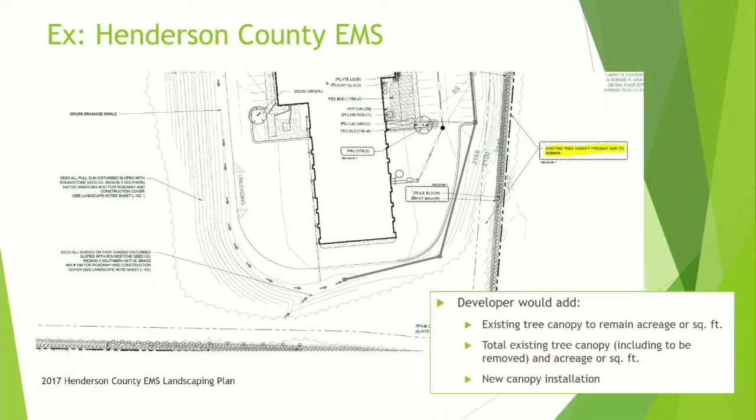So getting into the new canopy credits. You have to plant new canopy. How do you calculate how much canopy you're getting per tree when you plant a new tree?

This is a snapshot of the recommended species list. It's developed primarily by the tree board. Currently, it is a requirement for new landscaping requirements in our zoning ordinance — they have to come out of this recommended species list. I've got a snapshot here broken down by large, medium, and small maturing trees. It also gets into shrubs and flowers and other things, but we're concerned about trees here.

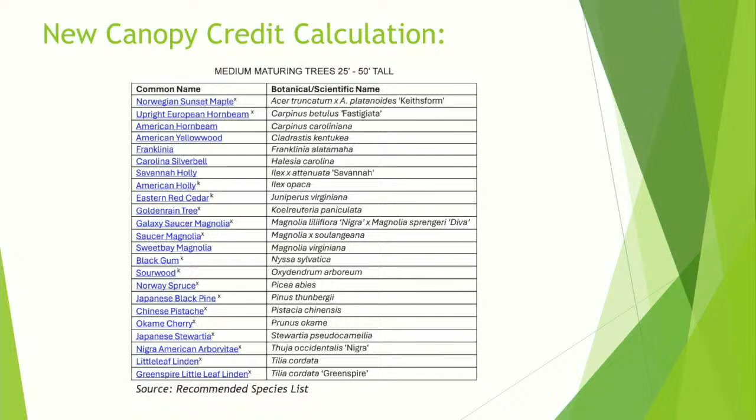So as an example, these are medium maturing trees, listed by species. What we did was look at the data on the North Carolina State Cooperative Extension's website. It's got a lot of information about the tree, including the mature dimensions. So we took the lower end of mature for these trees and assigned an average canopy to them.

So for a Norwegian sunset maple, the lower end of mature for that is 177 square feet. We did that for every single tree in the recommended species list, and then you have the averages of the various sizes. So the average size of a medium maturing tree is 350 square feet.

If you plant a medium maturing tree on your site, you're going to get 350 square feet of canopy credit towards your new canopy installation requirement. Does that make sense?

Question: how do you qualify what counts as a planting — how big a tree, what size do they have to be? Yeah, if you said that already, I apologize — typically they're 1.5 inches to 2 inches diameter at breast height at planting, I believe.

We don't set a new standard in this proposed ordinance. There are existing standards for tree plantings. They do vary depending on what's triggering them — some of the open space requirements have slightly larger tree planting requirements, some have slightly smaller, but basically between 1.5 to 3 inches DBH, diameter breast height, which is a standard way of measuring a nursery tree.

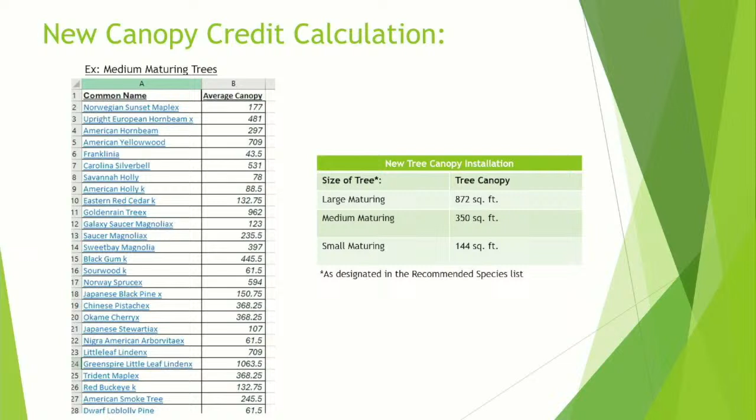All right, so getting into the fee in lieu, and the reason I had those slides before it is that's relevant for the calculation of the fee in lieu. As I mentioned, the tier 2 requirement, you can request a fee in lieu for that.

A note on fees, they are an exaction from the developer. So the fee in lieu there has to be a nexus towards the fee we're getting and the requirement that it's meant to satisfy. There has to be a proportionality to how it's calculated and, again, what the requirement is that the fee is meant to satisfy.

So the proposed fee is based on the cost for the city to plant new canopy to replace the existing canopy that's been removed. So you're removing your tier 2 canopy, as much as 10% of it, so we want to replace that somewhere else. I took a weighted average of those. I mentioned the square footages of the different large, medium, and small maturing trees, because we're not going to plant all large maturing trees. We're going to plant some medium and small.

It takes more small maturing trees to get to a certain canopy percentage, so they mean more in the calculation of the average size, if that makes sense. So I have in there the table of how many of those trees it takes to get to an acre. It doesn't really matter, it's the same weight for any set area you use. So the weighted average based on those is 228.84 square feet per tree.

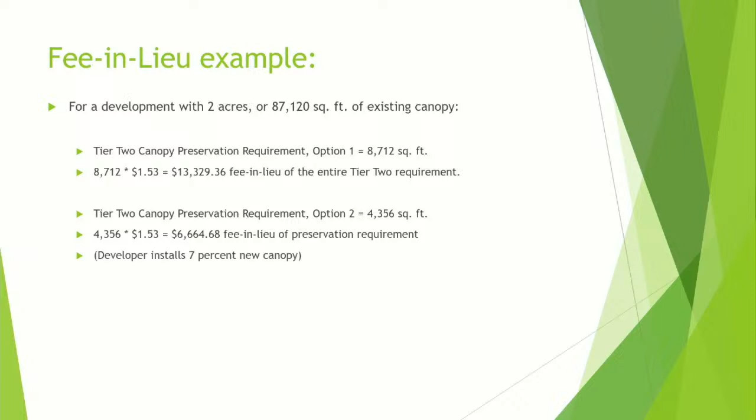All right. I got some of those things. These are your slides. Yep.

So just wanted to go over, so you heard that this was taken to planning board. The planning board received the draft revision ordinance from the Tree Ordinance Revision Committee as it had been developed going into the latter part of January. And staff, community development staff, my staff reviewed that ordinance prior to the planning board, kind of to put our eyes on it and offer feedback.

We had a couple of things. The first is just a clarification: it's called the recommended planting list. It really probably ought to be called the approved planting list. It's not recommended, it's required, and through this process, that's how it would work. So relatively minor clarification, but one that in reviewing the document, that was something that we had presented. The planning board was supportive of that.

We also, in working with landscape architects and engineers on a regular basis, would request that there be some way of reviewing the approved planting list on a regular basis with feedback from the development community, because they're the ones that are often obtaining plants, etc. This is not related to the ordinance specifically. It wouldn't be anything that would go into the ordinance, but would be just a process element.

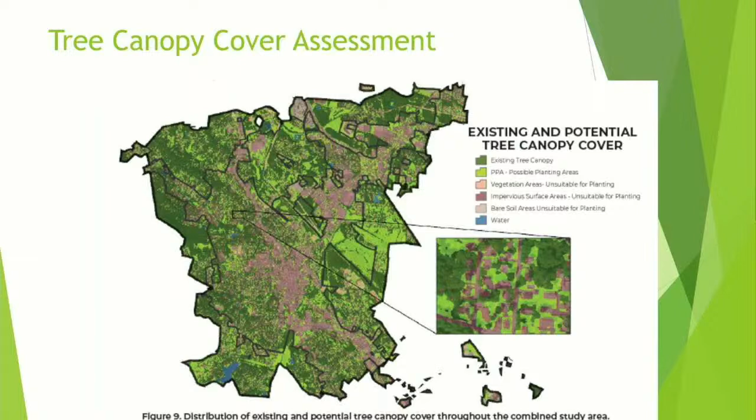Yeah, so we can go back to the very first slide just to talk about a little bit of the reasons. Many of the discussion points at the tree board are related to the preservation of existing trees and planting requirements, but not all. So from the discussion at the revision committee level was, with the adoption of the new standards, do we remove some of the oversight that's involved in the process? And there's, I think, just disagreement on whether or not the newly adopted standards cover all of the items that the tree board comments on and makes recommendations on in their review.

The product that came out of the tree revision committee is clearly a compromise, right? There were a lot of different viewpoints and perspectives on that committee, and there are both preservation standards and new planting standards that are part of those recommendations. So it's a compromise - and as such, not a dirty word, right? Yeah, exactly. As such, there are new standards, and part of the discussion was that with the new standards, some of the process-related elements that developers currently have to go through would be removed.

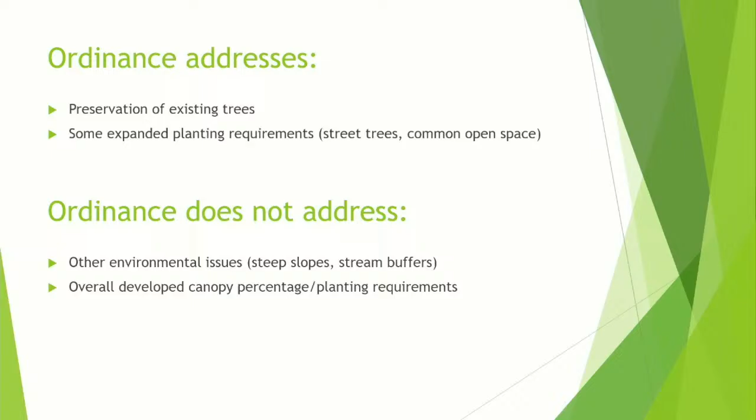I agree with you on that. If the ordinance is in place, if the staff and the planning board agree that everything's checked off and they follow the ordinance, what more can the tree board say? What else could they add to it? If it follows the ordinance, it'll be approved.

The tree board can't say, oh, we'd really don't like it after all. Nope, they followed the ordinance, so the tree board can't go back and change their mind on that. Now, the details of it, that could be modified in the future. If it looks like it's not working out the way we hope, you can change the ordinance, change the requirements.

Debbie, you mentioned the ecological benefits of the tree canopy, I believe is what you were talking about. Can you give some examples of what some of the ecological issues are that you're addressing that aren't already in the ordinance that I've read so far?